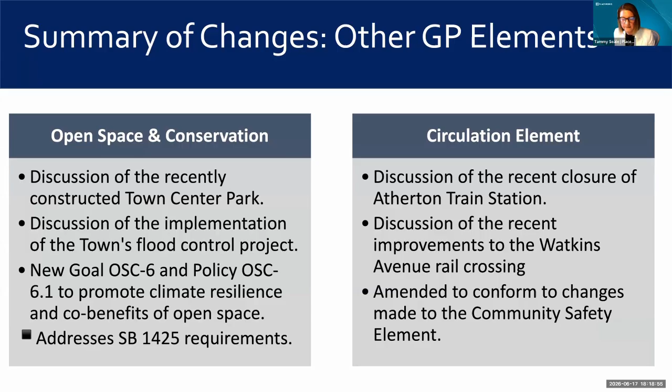However, in the open space and conservation element, we were able to provide some goal and policy updates to support conformance with another new requirement for open space elements, referred to as SB 1425, which requires open space elements to promote climate resilience and the use of natural infrastructure and open space in the climate resilience approach. In the circulation element, it's mostly just updating text and projects that needed to be freshened up a bit.

And so that's my brief presentation. You have in your packet that the Planning Commission also reviewed and considered this and recommended that your council adopt it. So back to our staff recommendation: staff recommends that your city council adopt a resolution to amend the Atherton general plan to implement updates to the community safety element, open space and conservation element, and circulation element, and direct staff to file the notice of exemption. That concludes our presentation.

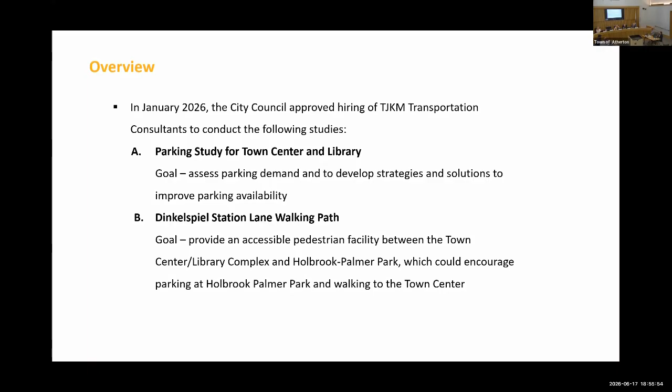So in January of this year, the town council approved a contract with TJKM to do a few studies for us, including an analysis of the parking here at the town center, with the goal of assessing demand and how we can develop strategies and solutions to improve availability, as well as to look at Dinkelspiel Station Lane and see how we can provide a safe and accessible pedestrian facility to go from the town center towards the park. I'm going to first go over the parking analysis, and then we'll get into the walkway.

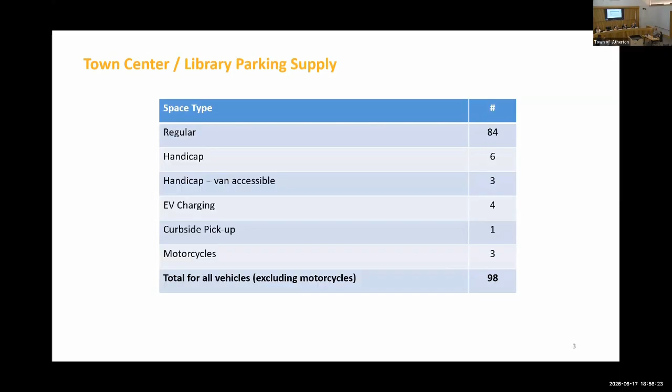Starting off, taking a look at how many spots we have here at the town center, there's a total of 98, including 3 motorcycle stalls, curbside pickup at the library, 4 EV charging stations, several accessible stalls, and about 84 regular stalls. We conducted surveys to find out how many folks commute and park regularly versus taking other means to get to work, including coordination with the library and the cafe to understand how many folks are coming in and out and what the busiest times of day are. The busiest times really are midday, the mid-morning to early afternoon, when we have library programs and large patronage at the cafe.

There was an assessment of employees and how many folks are here on a regular basis. We have about 35 staff, including the library, here on a daily basis. There are others that rotate in and out. We also have our consultants, including the planning department, but they're here only 2 days a week, which actually corresponds with a couple of the heavy days at the library.

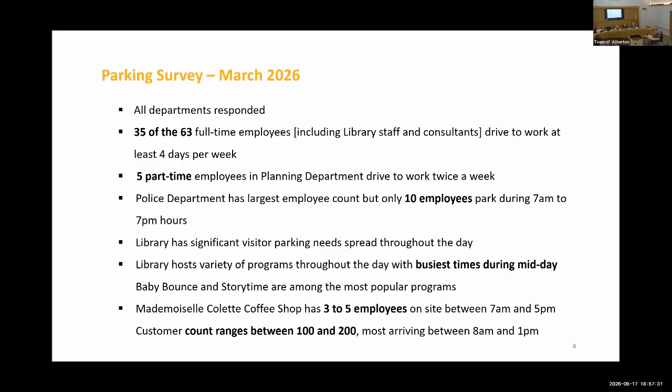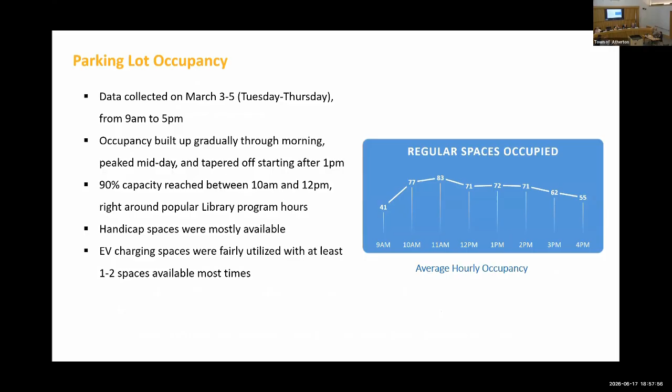With that, there were actual counts taken. Over 3 days, there was a look at how many folks are coming into the town center and parking. Basically what we found out is that we are peaking out really at 90% of the capacity, so we do get full.

And so the assessment also included taking a look at what types of stalls are being used and where we peak out. The peak really tends to be starting around 10 o'clock going into the noon hour and 1 o'clock, which is that heavy programmatic time at the library.

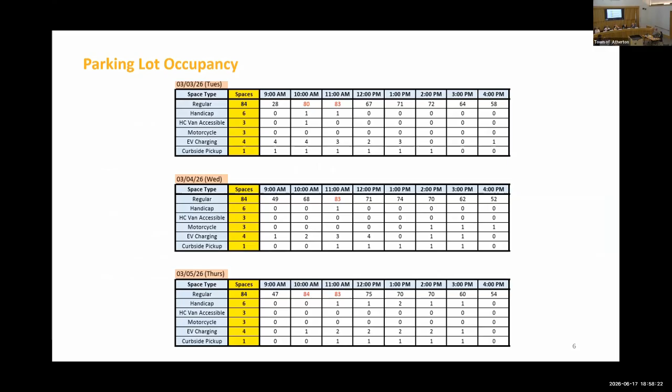In addition to taking a look at parking here at the town center itself, the beige area denotes the streets that were evaluated with regards to parking.

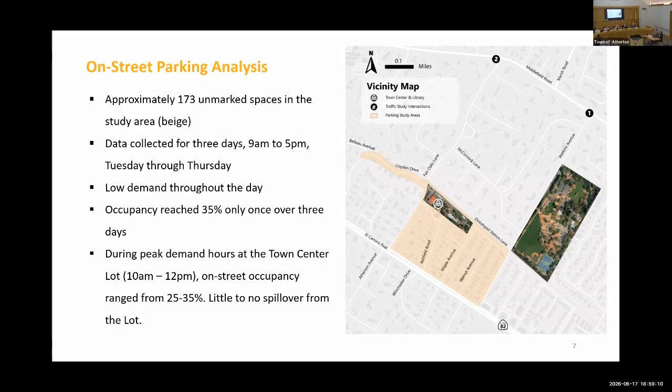Overall, the occupancy rate on the adjacent streets in the town center, now given that we have the permit parking program, we're really not maxing out the street parking right now. The effects of the permit parking program that the council adopted is really evident in terms of it reducing the impact on the neighboring streets, and it really hasn't spilled over too far out from the two streets that we have the permit parking program on.

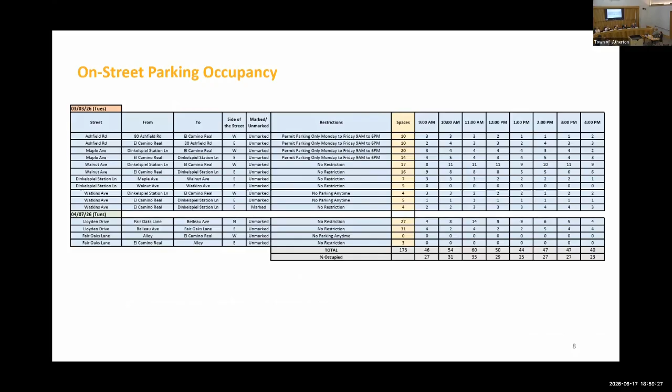In the report, there's an hourly count of how many spots are taken on during those days that the assessments were done, and overall what we found is that the overall usage of the streets was not very high. That being said, we are pretty much maxed out, and so the consultant looked at how we can expand parking here at the town center.

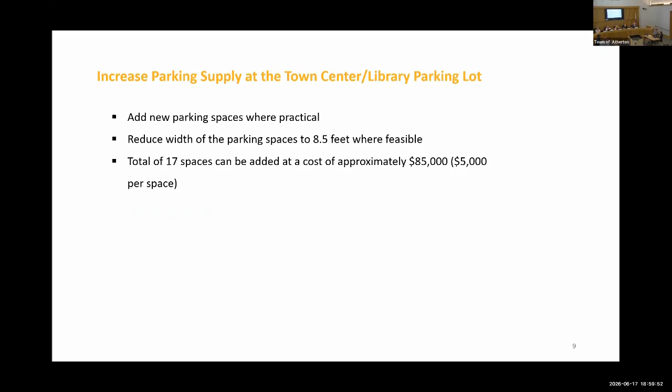Overall, there's the ability to improve the parking lot and add approximately 17 spaces, which is pretty good, which in essence is almost a 20% increase in terms of the spots.

You didn't spill any water or anything up there, I hope. It's empty glass, we're good. We're okay, it was empty. Okay.

So the largest area where parking is available to be constructed is in the mulch area between the existing parking and the corporation yard. Approximately 11 stalls can fit there.

And then by reducing the width of parking in certain spots from 9 feet to about 8.5 feet, still considered a standard size stall, they're just not overly generous, we can fit one additional stall close to the Station Museum.

We can fit another additional stall right in front of the Civic Court, as well as there's a tree that we removed on the side across from the library that can be paved and turned into an additional spot, as well as an additional motorcycle or bicycle spot.

So that's on the north side of the campus. And looking at the south side, there's the fence area along the driveway.

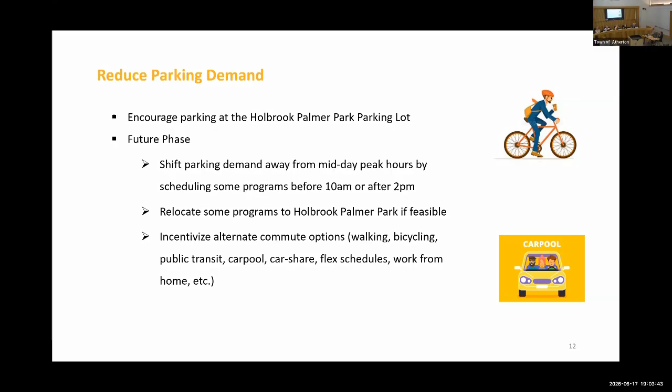So really what we're recommending at this point in time is to try and implement the improvements to increase the surface parking here, taking another look in about 6 to 8 months after those improvements are made to see how demand has changed and whether or not we want to take additional steps, such as working with the library in terms of shifting programming.

And so with that, I'll stop on the parking and allow for council questions. We have our consultant here to answer any specific details on how counts were taken and the individual recommendations. Then you can take public comment and discuss. Okay, do we have?

Robert, this is a very thorough report. Lot of information, graphs, a lot of numbers. I tried to simplify that in the report. No, I know, but you do it really well.

I think that we've all experienced the issues here. The question is, what is the lowest cost bang for buck for more parking, without doing all kinds of machinations of edging and knitting.

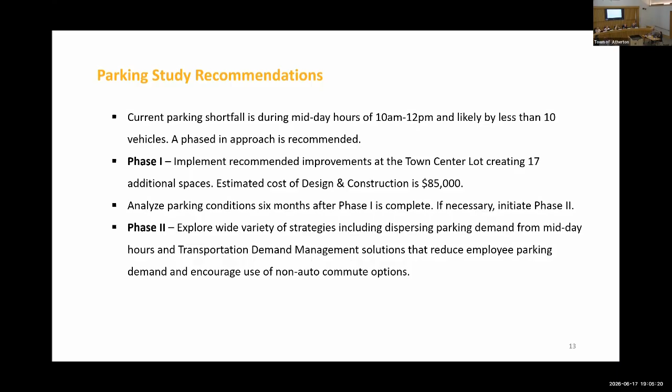You mentioned that you get 11 spots in the mulch area. That's going to get you the most spots. We also have that one tree that we removed across from the library, which right now is basically dead vegetation space that we could just clear and pave. The others on the north side are simply striping modification, so basically seal coating and restriping the lot. Overall, all of the items, I think the estimate was about $85,000 to do it all.

The one spot that's of most concern, I'm going to say, is concern about those utility vaults, and we can have a conversation early on with the utility owners to see how difficult it would be to make sure that they're traffic rated, and what it would take to make them traffic rated if they're not. Is that a particularly expensive change? It's just one spot, so you get one spot for that.

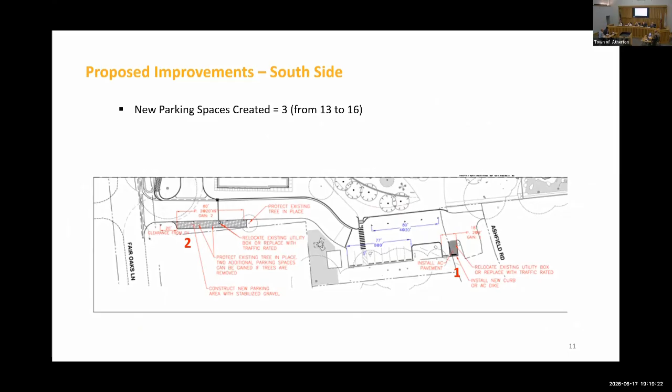Madam Mayor, can you go back to the other slide? The spots near the train station—when the train station project was put in, there are a lot of gaps in those spots that make them overly big, and there's a spot you can't really park in if you park in between the lines. So they do need to be restriped anyway, just a thought.

Okay, anyone have any more questions before we take public comment on the parking component of this?

Anthony, is there any public comment? There's one from Alex Key, Robert's going to read it. Okay, and Jerry wants to speak too, so let's do the room comments first.

The question online is related to the accessible spots and whether or not some can be converted to regular. The recommendation is not to do that, and that allows each of the different parking areas to have an accessible spot with access to the different facilities.

For example, there's an accessible spot next to the train station. They were actually required as part of the original development, by law. It's also based on count, and we need to double check - I think Amit did the calculation. If we add more spots, we want to make sure we don't have to add more accessible stalls.

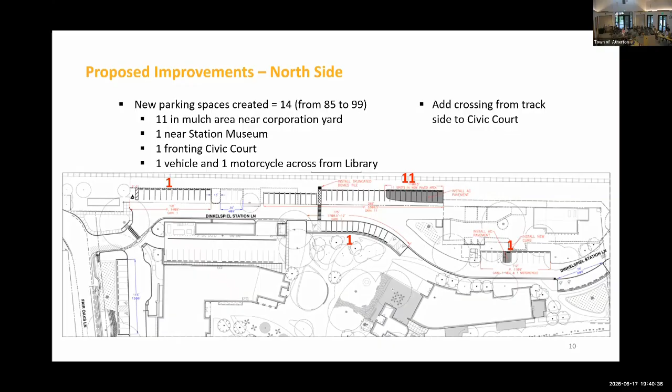Fantastic, you got it. That's great, okay, thank you. Okay, so let's move on to the, now the fun one. And we don't need a motion on that, right? No, just direct. No, all right, good.

Okay, so now the second study that was done was taking a look at providing a walking path along Station Lane between the town center and Watkins Avenue, to try to create a safe, convenient, and accessible walking path, which could encourage parking and access between here and the park. Maintain context sensitivity and try to reduce the level of stress for pedestrians, who right now are walking in the middle of the street.

Concerns that we have, I think everybody's aware: it's a constrained right of way. There's vegetation along the trackside, and the property line there is not that far behind the edge of the roadway. Crossing of Watkins Avenue is a challenge. And there are some utility constraints with utility poles on the trackside, hydrants, and other things located in various spots that we have to work around.

I think I wrote Watkins Crossing twice, so I apologize for that. And then particularly as we get towards Watkins, the visibility of pedestrians is a concern.

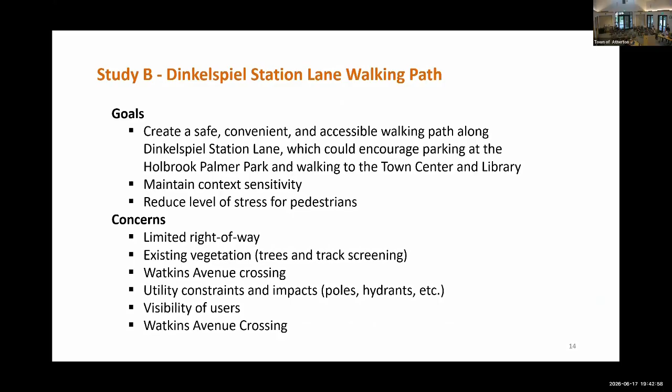As we continue down Station Lane, you can see that the right of way on that side is fairly clear. That's why it's being used for parking.

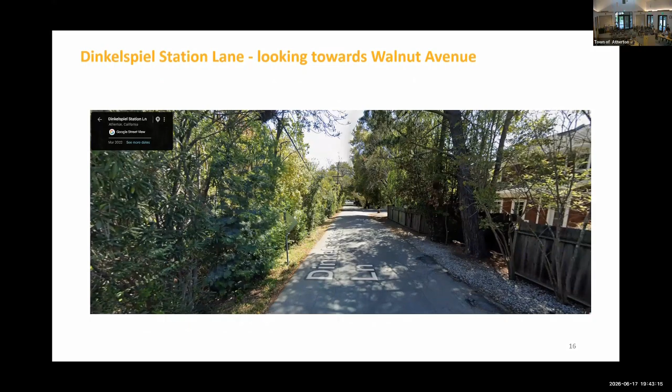This here is right at Walnut. Again, the right side is fairly clear. There's a stump there that looks like it's in violation of our ordinance. But then on the left side, you'll see the utility pole that's right there at the edge of the roadway.

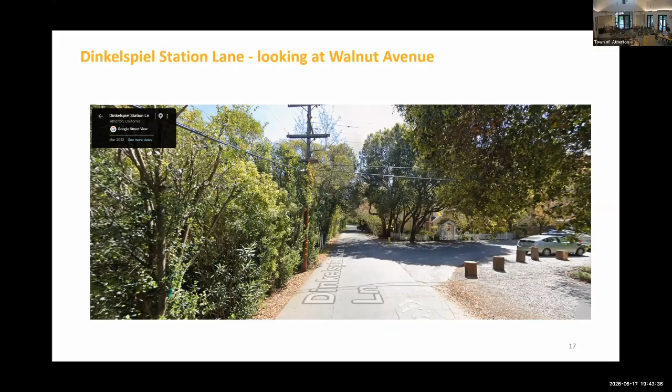This here is looking backwards towards Walnut from the next property up. The tree looks like it's far enough away that we can, I'm going to say it's within the tree protection zone, but we can probably still do something with regard to putting in a pedestrian facility without hopefully taking out the tree.

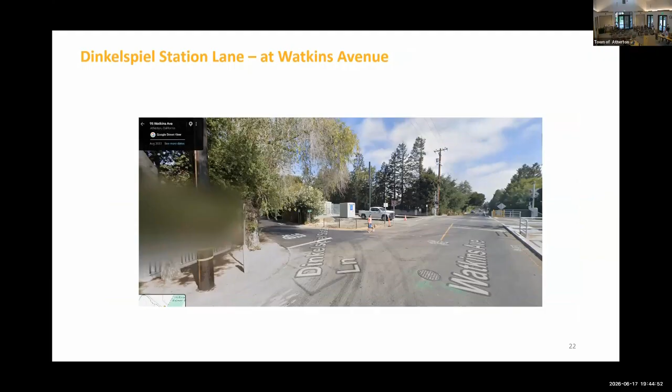As you come up and over, the fencing and everything right there at the tracks is a hindrance to visibility. So if you're going to pull pedestrians on the track side, they're not going to be very visible to oncoming traffic. There was an analysis done before showing that we can't really put a walkway on the opposite side of the street—there's not sufficient room. This is Watkins looking towards the tracks from near the park.

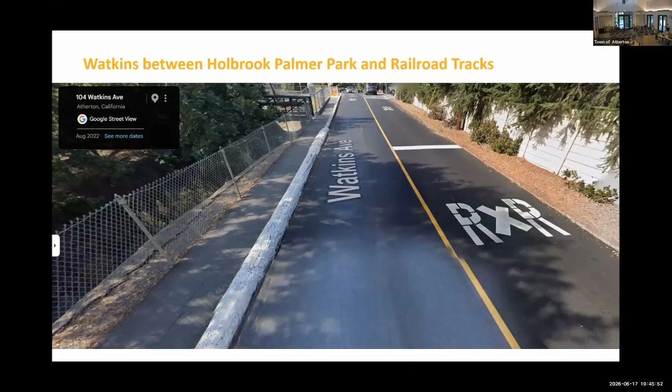So this is looking westward along Watkins towards the tracks. Okay, so we did a few analyses.

This first alternative looks at putting a 5-foot wide walking path between Maple and Watkins, adding crossing enhancements at the different intersections. This will require removing potentially up to 12 trees, depending on how much we're impacting roots and so on. Not all of those trees are heritage trees, but as you saw in the imagery, there are some large heritage trees, so I'm not going to say we won't have to pull those out. But that's alternative number one.

This would lose all of that parking along the street to accommodate a pedestrian walkway. The estimated cost for design and construction is just over $200,000. We have allocated a lot more than that in our current budget to allow for it.

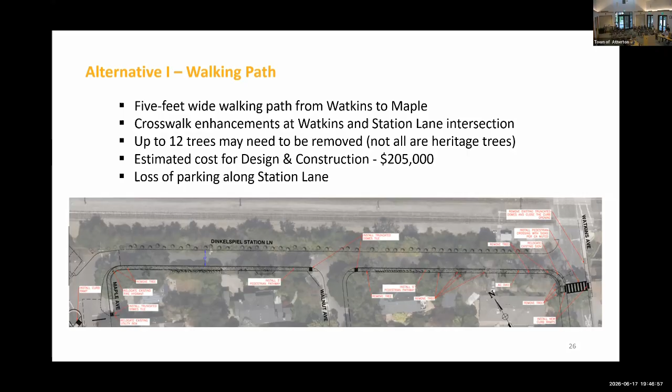The second alternative is if you wanted to try and keep some parking next to the town center and provide a walkway on that second block, we're still going to be removing a lot of the trees along that edge. It's a little cheaper because you're doing less work near the town center, but the downside is that you're not really providing a full walking path, meeting the objective of getting people from the town center towards the park.

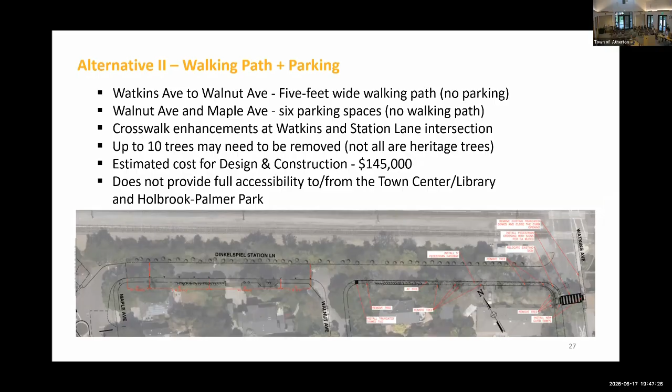We also took a look at potentially doing something along the track side. It's a constrained right of way all across. Though we're not going to be taking out trees if we just try and do the walkway on the track side, there's a large impact to loss of screening and sound buffering due to the vegetation as we clear that area to put in the walkway.

That does include not just shrubbery, but there are some heritage trees back there. We would have to do a full survey to see what that impact is, which we didn't do. There is no fencing along the majority of that.

And the consequence of removing some vegetation is that we would likely have to put some sort of protective barrier between pedestrians and the rail tracks, and that would require coordination with Caltrain in terms of where something is going to be put and how do we deal with that. Do we need to actually put that a little bit on their property to accommodate the walkway?

I showed you the image of the utility pole, so we'd have to figure out how to get pedestrians around that. Theoretically we could maybe put it around the backside, but that again requires coordination with the utility company or Caltrain. Another concern is if you have people on that side, it's not really the safest place to cross Watkins, and there's a challenge getting them to go backwards to cross the street in a safer location.

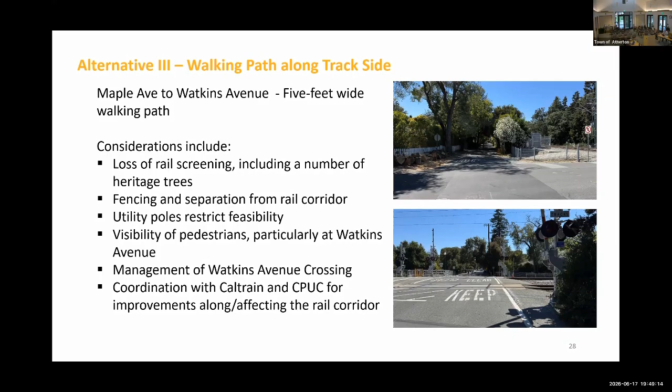So we looked at that, and ultimately the recommendation is to go forward with alternative one, which provides the easiest, most direct pathway for pedestrians. It gives them the comfort of not being next to the train tracks after you remove the vegetation, understanding that there are some impacts to the trees along that side of the road. The overall cost of that is somewhere around 200,000.

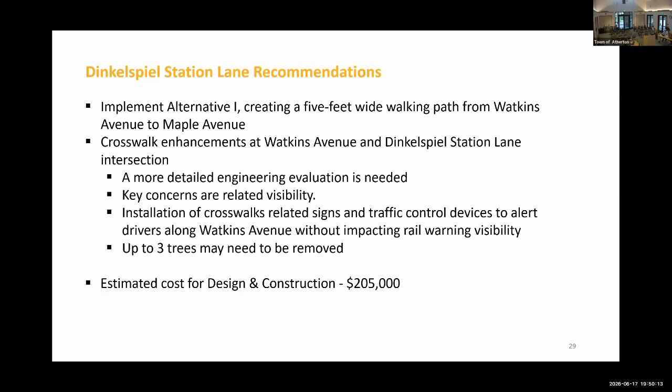When I was talking to George, I had asked if the road could move to accommodate trees and a walking path, and you used a term called jogging the road. I was wondering if you could explain that to the larger group, what that is and whether that's an option. I'd already talked to Robert about it. If you look at this image, this is probably an illustrative example of where that theoretically could be possible.

There'd be more analysis needed. This is just a preliminary conceptual level. But the idea theoretically would be to take that left edge of the road and shift it over by a couple of feet or so. The likelihood is that that would be after Watkins, because you have the utility pole right at Watkins and you can't shift the road any closer to it. So with that shift, it may allow for some additional room on the right side of the roadway.

The question is about the proximity of those large trees, I think those are redwoods right there, and how they've already uplifted the roadway or the adjacent area, the fencing and everything, is whether or not you'd be saving them as you try and do that. It's really a matter of, we can certainly take a closer look at it, but intuitively I think with the fact that we're going to have to dig out to put something in, we're going to be impacting the roots of those trees.

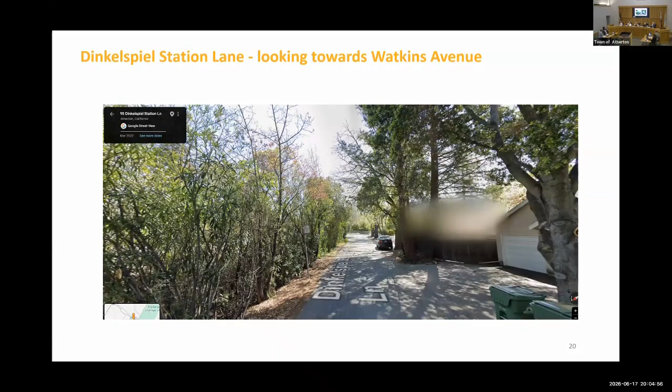I don't think the oleander screening on the track side is all that important. If you took that out, you could put in other screening next to whatever we put in, but there is a telephone pole right there, so it's not easy. But I do think whatever we do, we have to do it long-term.

The comments the chief made and Eric made about it being one-way, south to north - I think south to north is the only possible way you could do it. North to south would make zero sense. I agree, and I'd like to know what the neighbors think about that. That's not a bad idea.

I really like the idea of taking out the oleanders, but the telephone pole makes it not all that attractive. You can't move the road over - there's only about 3 feet there.

The final comment I'll make is, I think the worst thing we could do is take out the 6 parking spots when we're really working hard to find more parking around here. So I'm totally opposed to that alternative - I just don't think it's the right thing. The one-way solution is a much better solution if we're not going to find alternative parking. And finally, we absolutely have to put a crosswalk across Watkins - there's no question about that. If you did it one-way, you'd get rid of that awful left turn from Dinkelspiel onto Watkins, but you'd still need a crosswalk on the west side so people can cross.

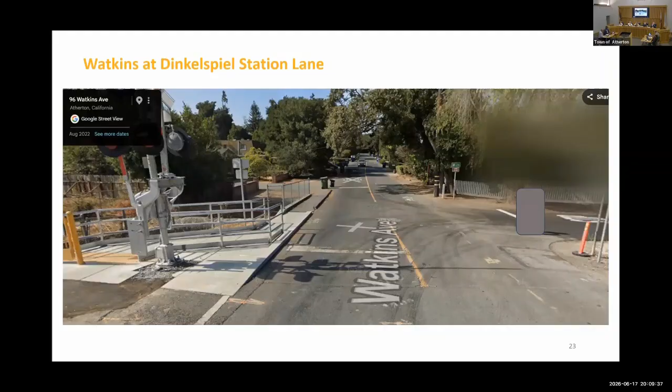Okay, so it sounds like there's consensus on investigating doing this - all four people have said yes. I also would be in favor of doing a topographical study. I think all of us want to preserve those trees.

I think we absolutely have to have a dedicated path between the town center and the park. We as policy have had in all of our marketing to use the park as our overflow parking lot. We need to provide a safe way to get between those locations. And I think if we're going to have a crosswalk, which there's clear consensus we need, it has to go into a path, or else people aren't going to use it - they're going to walk on the wrong side of the road.

We're serving a lot of kids with the library and library services, and a lot of families have just stopped coming to story times because parking's so annoying. But I think we would see an increase in people using our new playground in the park, and there's beautiful potential. This could be a nice improvement in usage of all these services if we have an accessible path for people. So I would love to understand the options for jogging the road so we could preserve as many trees as we can, by shifting the road over to have the path on the resident side instead of the Caltrain side.

So my view is, let's do both and see what our options are. Is there support for both or just one? Can I give a suggestion in terms of what I'm hearing, and maybe you can accept it as direction or provide additional feedback?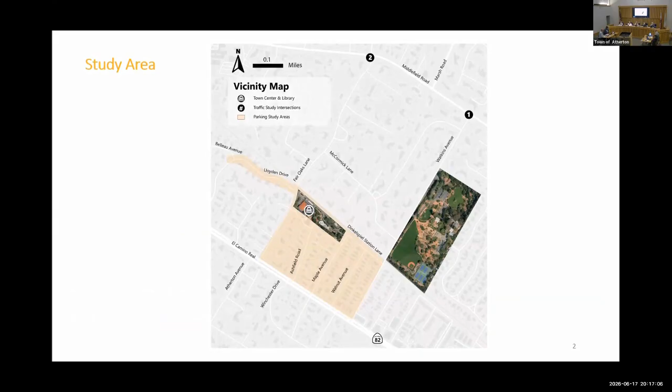We did an analysis to see what type of traffic control devices would be appropriate at each of the intersections. That includes looking at full signalization with a traffic signal, installation of a high-intensity activated crosswalk, which is a HAWK beacon - I think you're all familiar with those on El Camino Real, where a pedestrian hits the button and it turns the light red for the main roadway so folks can cross the street. Then the rectangular rapid flashing beacons are similar to what we have here at Fair Oaks, where you hit the button and the strobe lights warn oncoming traffic of pedestrian activity.

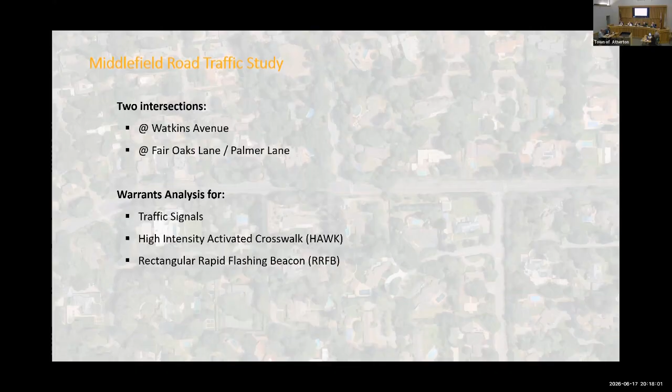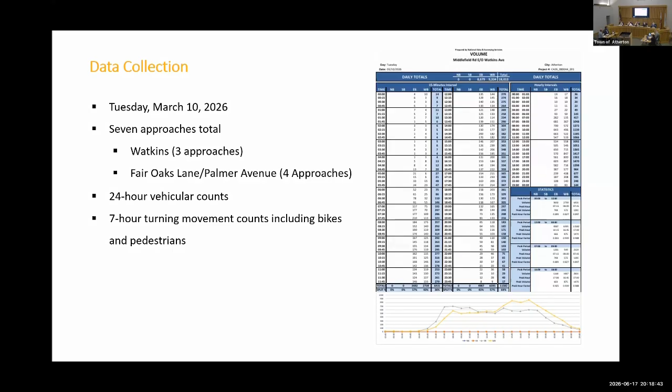So we did the analysis to see what would be appropriate. There was a data collection done on March 10th, looking at basically 7 approaches on Middlefield at the intersection - 3 at Watkins, which is the T intersection, so the north-south directions on Middlefield and the eastbound leg of Watkins, as well as the 4 legs at Fair Oaks/Palmer. Included in that was a 24-hour vehicular count, so they had a counting device counting traffic, and then 7 hours of turning movement counts, as well as measuring bike and pedestrian activity.

So there are 9 different warrant analyses that could be done to validate the potential of putting in a traffic signal and whether or not you can or should do that. The first one is basically taking a look at all of the volumes on the roadway over that 24-hour period and looking at if 8 hours exceed certain thresholds. In this case, on the main roadway you'd be looking at a minimum of 500 cars going on Middlefield, both directions, and on the side street, having a leg that exceeds 150.

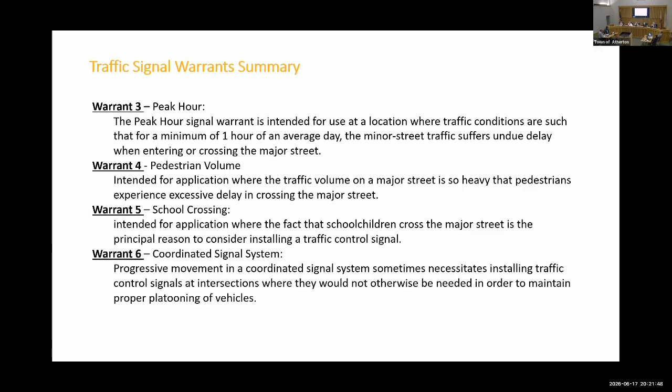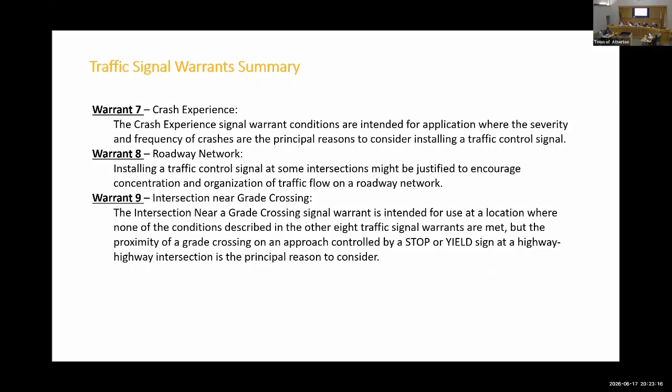Yes, can I ask a quick question? Sure. In your graphic of the picture, go back to that - you see that Middlefield on the west end, north end, has that yellow oval in it. I'm sorry, just give me a second to get to the right one.

Yes. So if you're sitting here on Watkins wanting to make a left-hand turn, and the traffic starts to clear on Middlefield coming from the Marsh Road stoplight, but there's still a lot of traffic coming up from the other side - can you just sneak your way over clearly and come into that yellow holding section safely, and then wait until there's a break and then go on?

Let me modify the question - could there be a lane stop created just like where Alejandra comes into El Camino Real? No, that's not what I'm asking. There's like a safe spot surrounded by the yellow striping, a merge lane. Okay, we can get into more details later, but technically that is a median island, and so right now the answer is no - it's a flat spot striped as a median, not an island you're allowed to do that with.

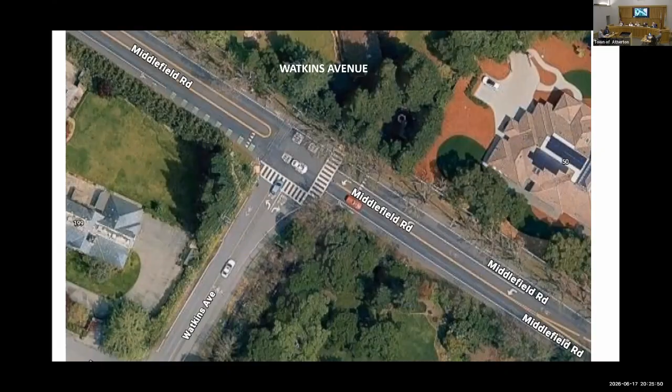And then somebody coming up the road, they're very nice and they'll let you in. We aren't only talking about traffic study for light on those. I was just wondering, I just had to ask.

That's a good question. We are not doing the comments yet, though, guys. We're hearing a presentation. She asked a question.

Is it legal? Okay, so again, highlights, we met the 4-hour vehicular volume threshold as well, and the peak hour volume.

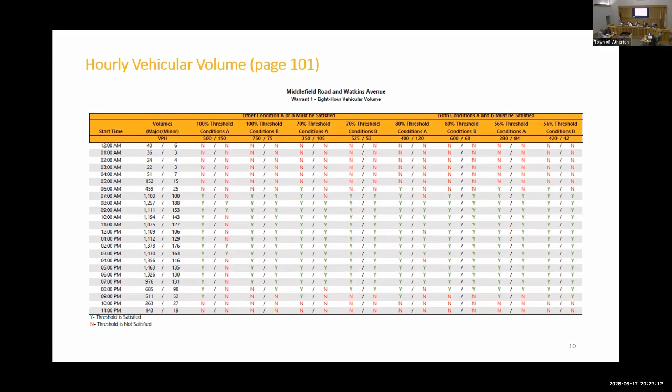This is just taking a look, illustrative, that we did do turning movement counts and pedestrian counts. And the pedestrian counts during the 8 hour window that they took were extremely low. It's not saying that there aren't pedestrians, but that day that they took the measurements, the pedestrian use over that period of time was not there.

Was it on periods of time that you... So this here is illustrative of the peak hours from 7 a.m. to 10 a.m. and from 2 to 6. During any of those periods of time, the pedestrian counts were like 1 or 2, so it wasn't really heavy during those periods of time.

Do you know what it was like? Like it's March. It was a sunny day. Okay.

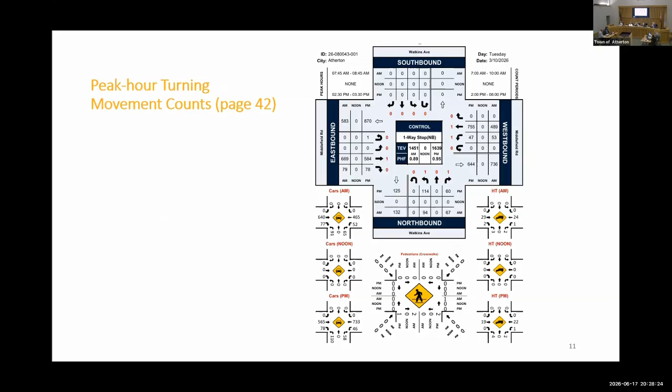And I'm going to say that when the work was done, we were cognizant to pick after the work on Middlefield at Marsh was complete, so that didn't interfere with the traffic counts. There was a whole bunch of stuff going on, so we were cognizant that if we do it now, that's going to be impacted by that construction activity, and we had to pick a time period that was not impacted by that.

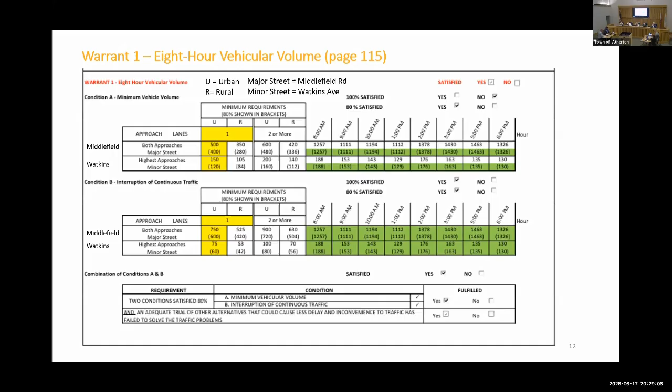So here is another illustration of that warrant one, kind of simplified, indicating the hours at which we met or didn't meet those warrants. Item number 2, which is at 4 hours, they don't have to be 4 consecutive hours, just 4 hours during the day. The warrants were met at 8 o'clock in the morning, 2 o'clock in the afternoon, 3 o'clock in the afternoon, and 5.

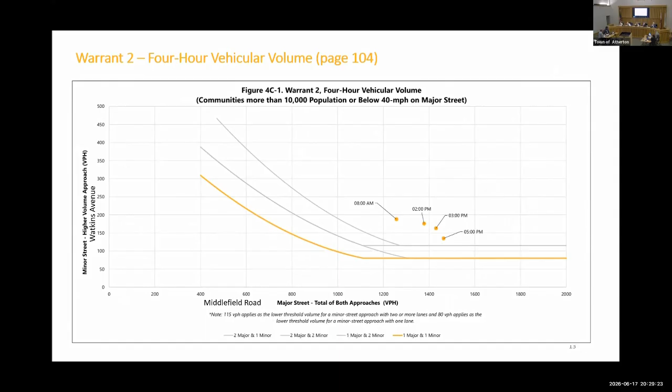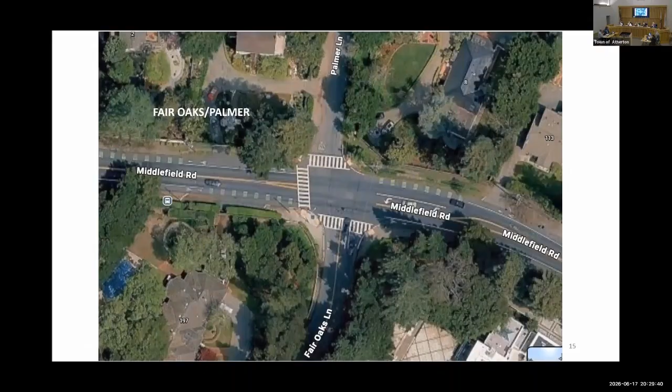And then for warrant 3, it met that peak hour warrant as well. Looking at the Fair Oaks Palmer, again, it met those same 3 warrants. So really, I'm going to say, in terms of warranted, yes, the signals are warranted. It's really a policy call on whether or not they're desired and in which order.

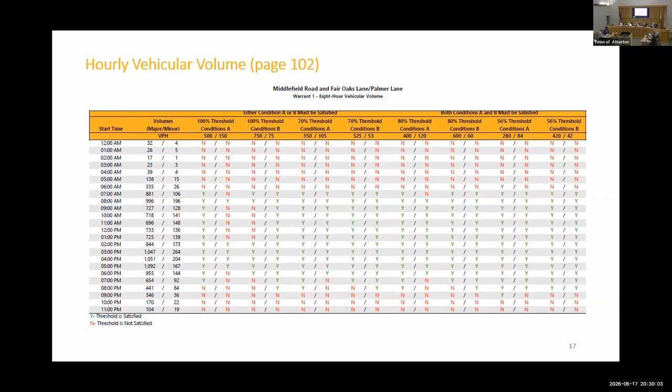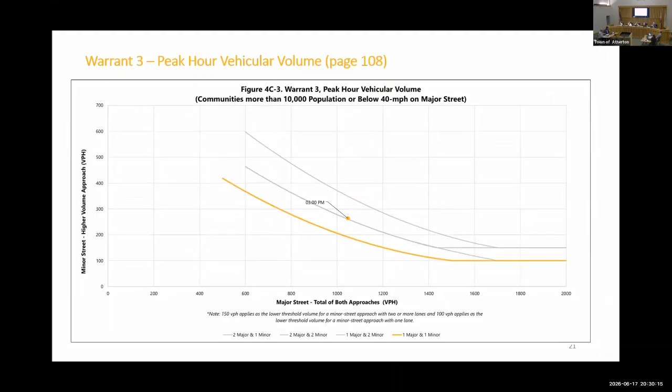So I'm just going to speed through these. I'll say we met the warrants. We have the data. If you have questions, we're happy to answer them. Then here I'm just trying to get through.

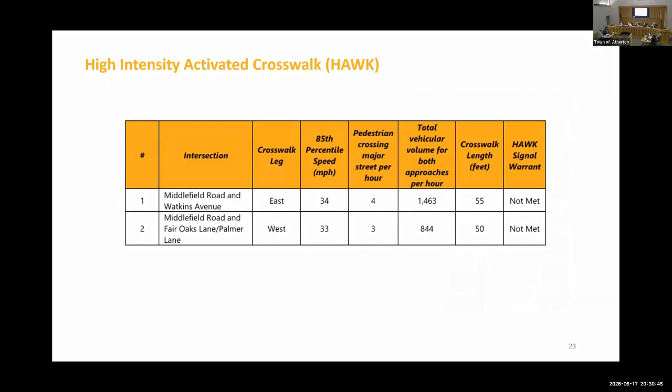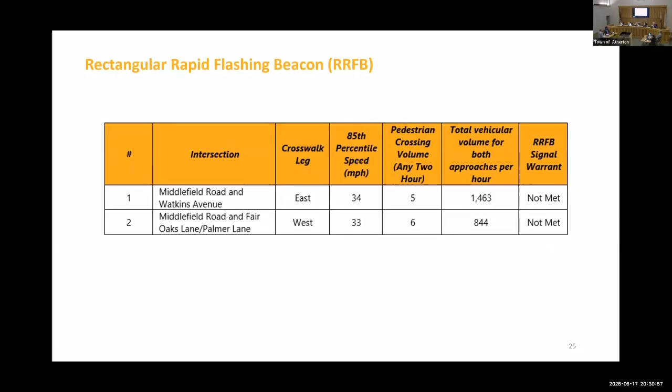So the Transportation Bike and Ped Committee recommended moving forward with the next step of evaluation. That really includes, this here is just a warrant analysis, it tells you you can, but really taking a look in terms of what the impacts of putting those signals in would be, and looking at how that signal would be coordinated with the rest of the corridor. The recommendation is to look at that sequentially, looking at today's volume, doing a projection for 5 years or so out, and seeing what that volume would look like. Model that with Watkins, and then layer on top of that Fair Oaks, and see how operations happen and how they would potentially change by adding that second signal.

So with that, we're happy to answer any questions, and we are seeking feedback on how and if you would like to proceed with next steps.

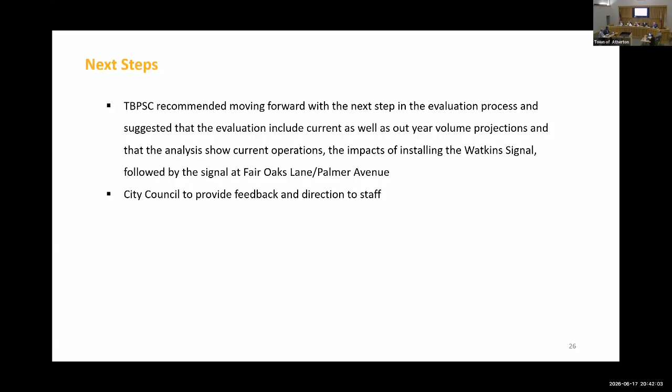As part of its annual review, the city council conducts a performance evaluation of the city manager, and it did so this year in accordance with past practice. Following the evaluations, the council found that the city manager had been performing outstandingly and was very pleased with his progress and performance. To that extent, the council wished to amend his employment contract to provide a 2.5% cost of living adjustment, commensurate with other employees.

That would raise his existing salary from $294,973 to $302,347. The council also wished to give him a one-time $15,000 bonus, again for excellent performance and retention. So the recommended action is that what was discussed during closed session is now memorialized, and we recommend that you approve it.

Public comment? Okay, great. All right, we're closing public comment. Do we have a motion? So moved. Second. All in favor? Aye. Aye. Yes. Look at us.